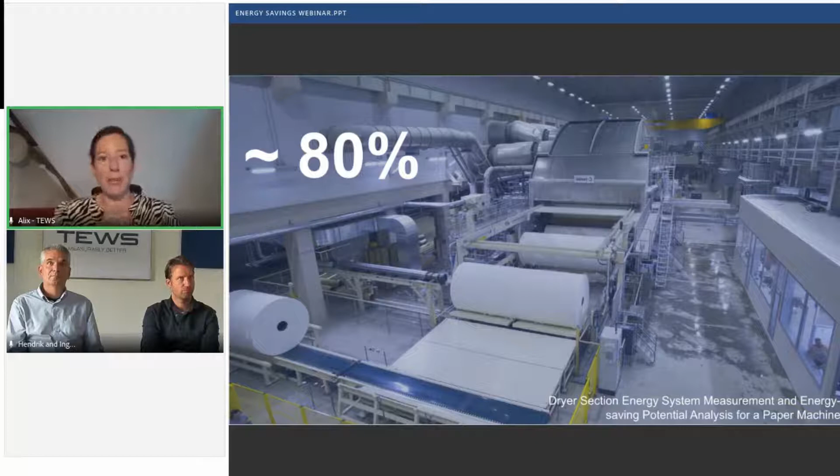At TEWS, this is something we have worked on in the past. Now, with the energy crisis that Europe is facing, the question is not shall we reduce our energy consumption, but how can we do it? That's why today we're hosting this event, because at TEWS, water is the core of our activity. This was a topic for the previous months.

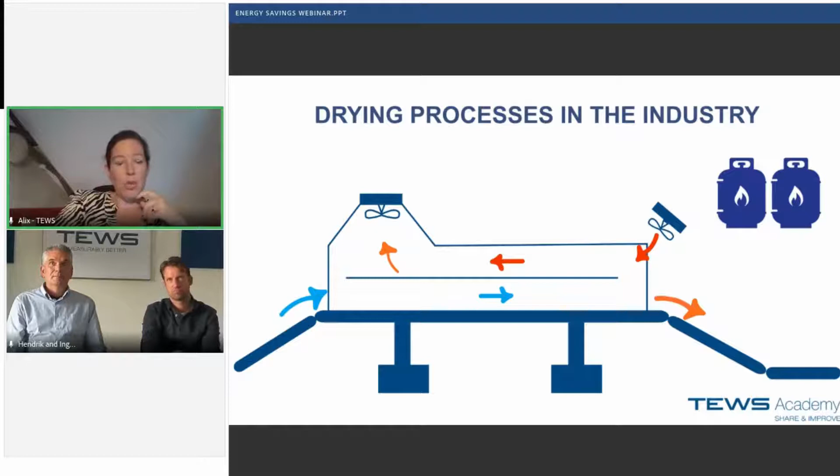When it comes to drying, the objective is always the same: removing the water from the product. So maybe, Hendrik, can you tell us through physics eyes what happens in the dryer, no matter its shape or process? Why is it so energy consuming, and maybe how could we help to reduce this energy consumption?

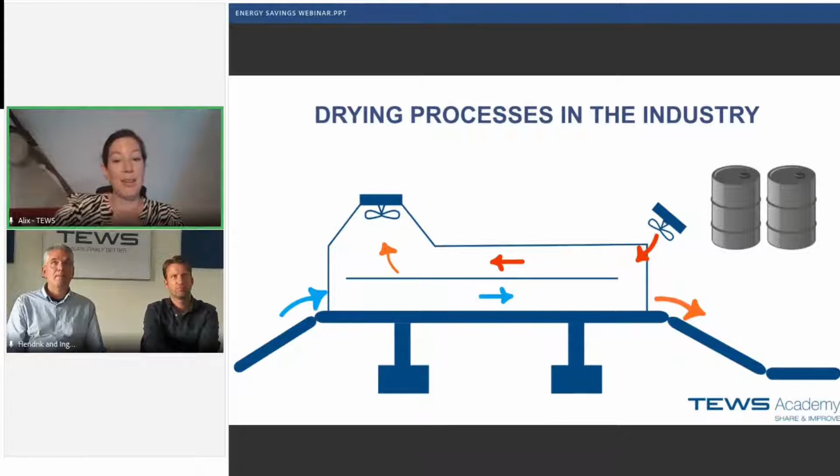Sure, welcome. I won't go into the details of physics too much now - it's a passion of mine, to be honest, but everybody sharing this with me is of course welcome to discuss this later if you like. So, the goal of the drying process is to remove water from the product to achieve a process-specific target moisture. Our technology allows for controlling this process, either backwards, as you see on the picture, measuring right after the dryer, or even upstream to the dryer in some situations too.

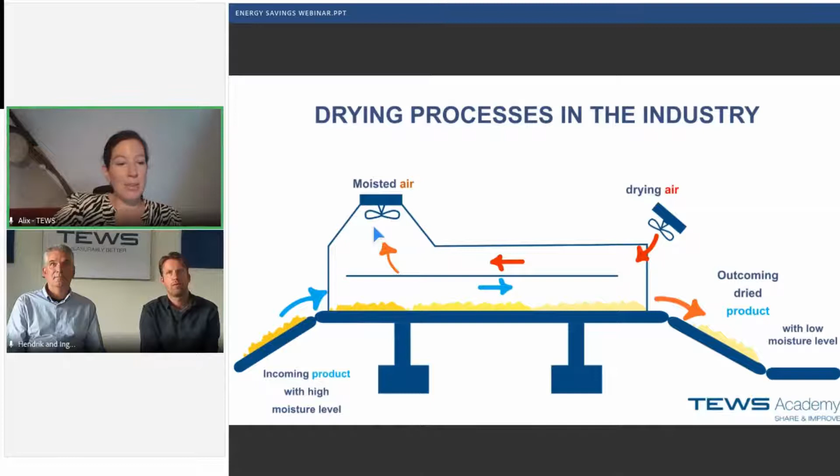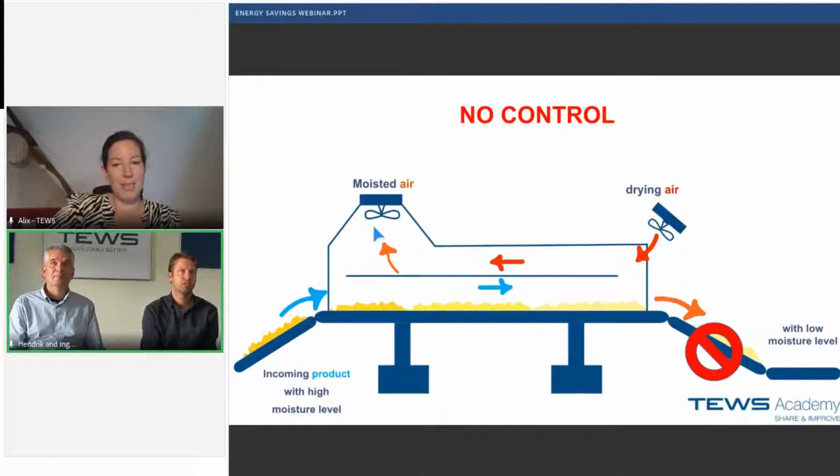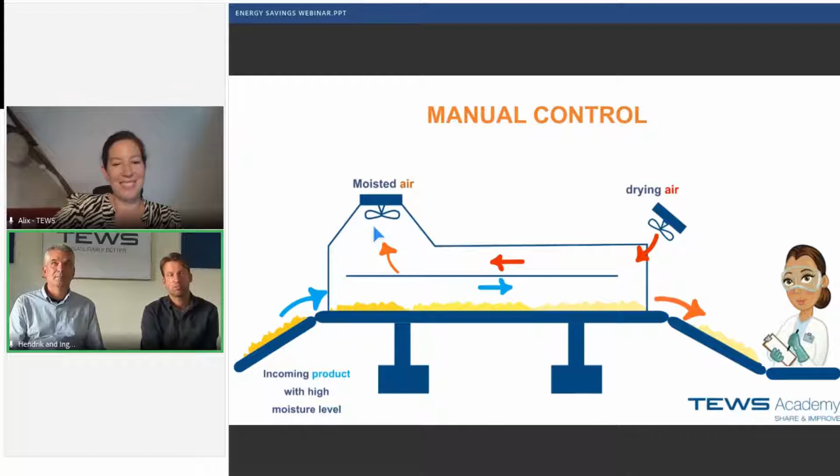I think there are many ways to control the moisture. First of all, it's clear that without any measurements, an optimization of the process is not possible at all. So to determine the moisture can mean just taking samples from the line, like the lady here, or using smart sensors like ours.

Okay, and so maybe can you illustrate furthermore? Yes, of course, we have a little animation here to illustrate this. So what we see here is a standard drying process - it shows how the moisture content of the material decreases over time. And as we can see, since the curve is getting less and less steep, the drier the material becomes, the longer it takes to further reduce the water content, right?

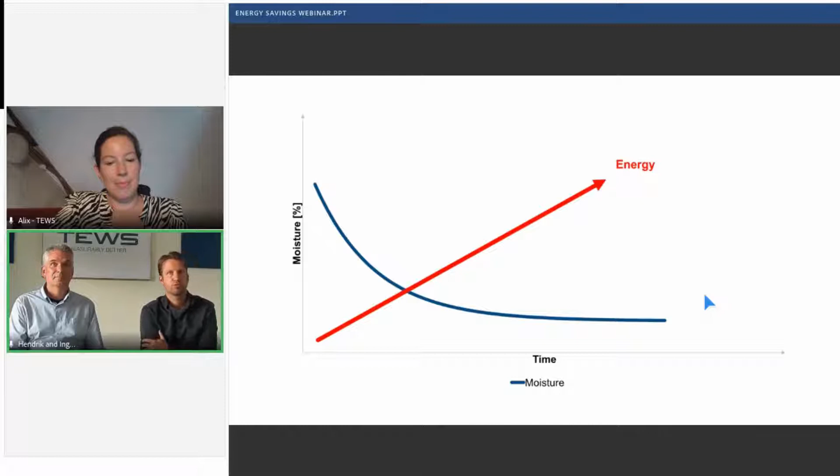The more energy is required to remove the very last water drops. So there is a point when the drying process is supposed to be completed, when the threshold is reached, like here. In order to ensure the required quality and save energy, we want to stop the drying process just right in time, as soon as the threshold value is reached.

For this purpose, we need some method to measure moisture. This could be just taking samples from the line, taking them to the lab, drying them down to zero in an oven, and waiting for the results to come back from the colleagues in the lab. But this is quite time consuming, and this is time we do not have. It's also energy intensive.

So instead, online measurements provide the results much faster, and that's the reason why those are really mandatory in this situation.

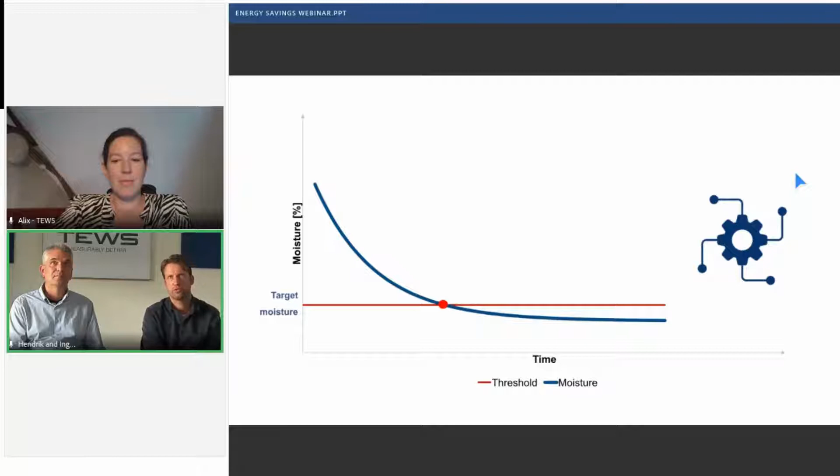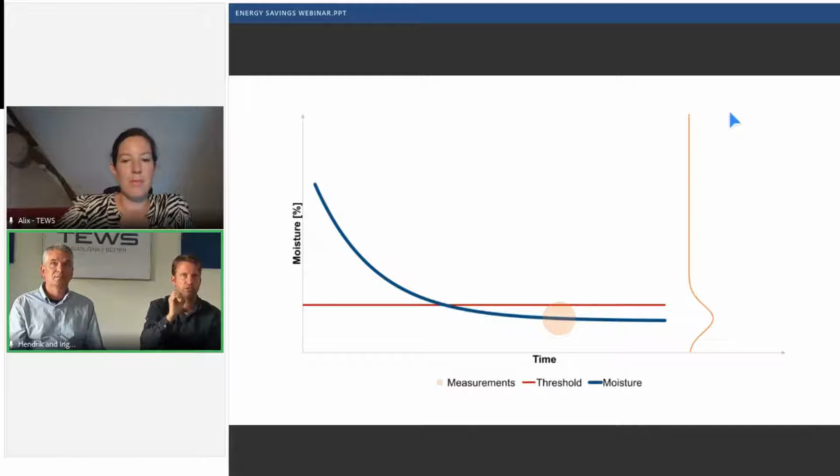Now, if we want to be very sure that the threshold is already undershot, we have to wait until the majority of these measurements, not only a little bit, not only half, but a majority, are really well below the threshold. So to be able to stop the drying process as soon as possible, we need to use a measurement device as accurate and precise as possible.

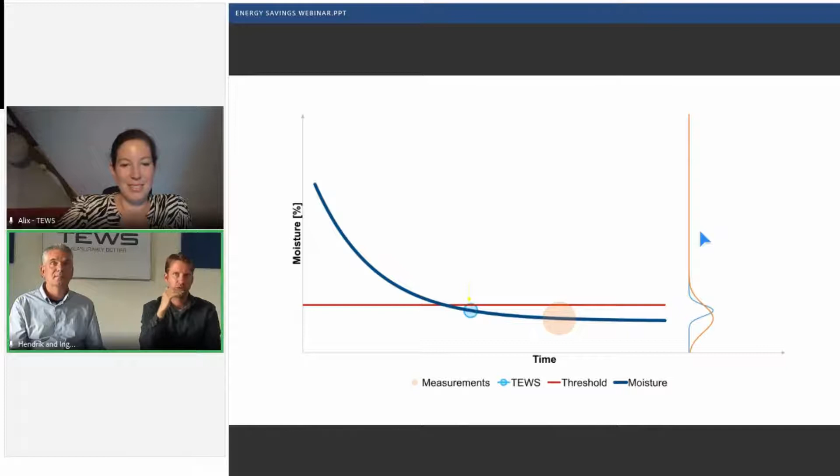In this example, I've given a microwave device as provided by us, by TEWS. We can see on the right-hand side again a new Gaussian distribution, this one in blue. It's narrowed down because it's more accurate, so it fits earlier under the threshold. And if we recall the energy curve, we see that the energy consumption can be decreased tremendously by that for many situations, and you will give us an example or two later on.

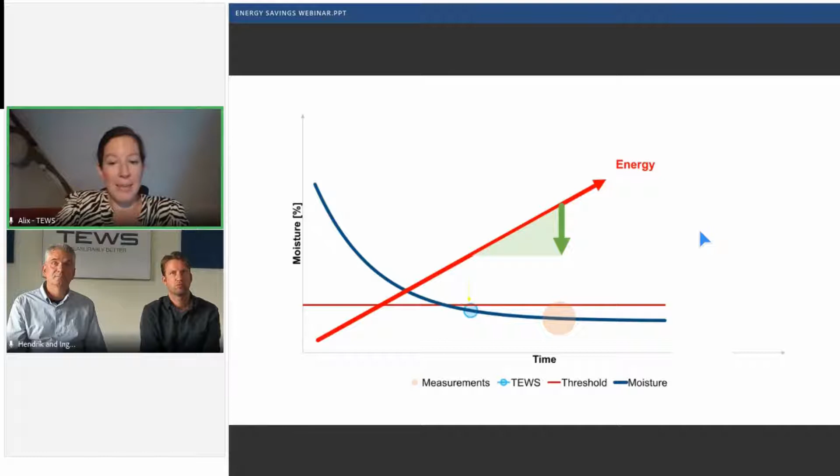So you're insisting on the accuracy, and I understand that the more accurate we are, the earlier we can stop the process, and then the more energy can be saved at the end of the day. So it's all about accuracy. Maybe we could give our guest a short explanation: why is TEWS technology more accurate to use than other measurement methods?

Well, that's because of the very nature of the microwaves you use. Microwaves are completely penetrating into the core of the material and not just measuring the surface, like it's the case for NIR, for instance. So the microwave measurements represent the material on the conveyor much better in comparison. And for the same reason, the method is also not as sensitive to environmental conditions, like varying air humidity or varying temperatures, which mainly affect the surface of the material, pretty quickly sometimes. But the core would be unaffected by this, and we measure the core. So again, our method really represents the material much better.

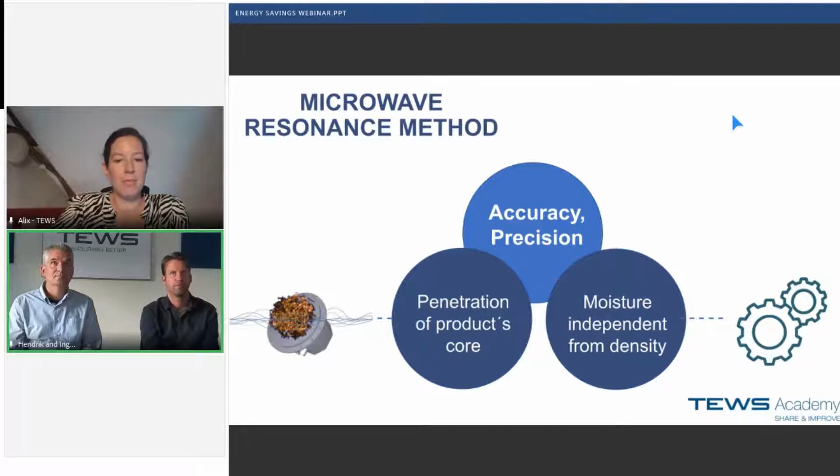Another important reason is that our technology can measure the moisture regardless of how much material is currently on the conveyor, on the sensor, and even regardless of how dense the material currently is. This should be clear and simple, but it's not the case for every device on the market. For us, this is a great advantage of our technology, especially in comparison to the so-called capacitive methods. So to sum it up, it's really the very nature of the microwave frequency range, which is just very well suited for all these types of applications.

Precision, huh? So in order to see how precise moisture control enables energy saving, I suggest that we take a few examples directly from our industry partners who were kind enough to share some data with us.

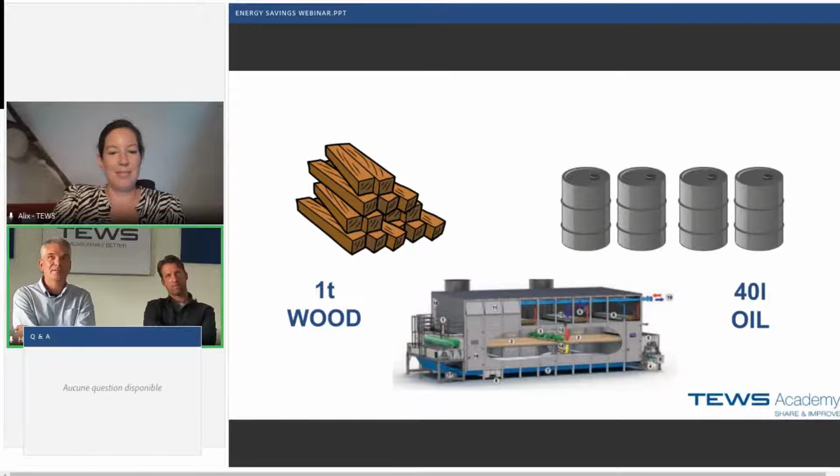Yes, Alix, very gladly. So we know from our wood manufacturer partners that to dry, for example, 1 ton of wood, around 40 liters of oil is needed. So legal norms oblige companies to make sure that the wood or certain products made of wood are below a particular limit of moisture.

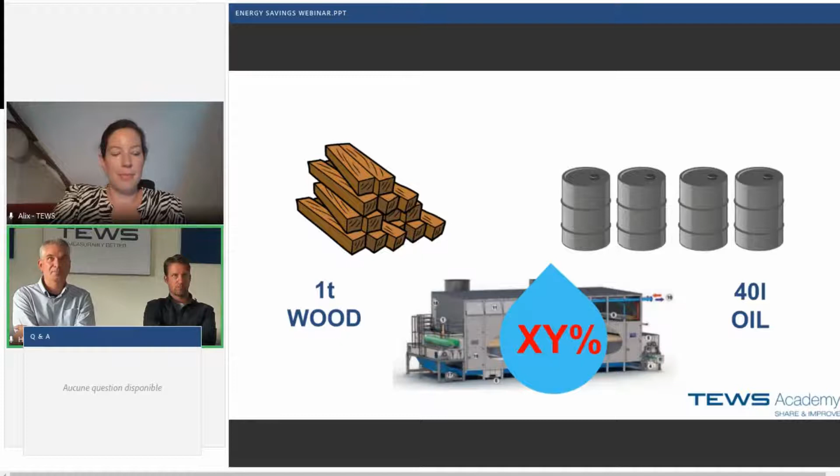So as an example, we can take the wood pellet industry. Wood pellets are classified in different qualities. For instance, the ENplus pellets, which is a European standard - for them, the moisture has to be below 10% water content.

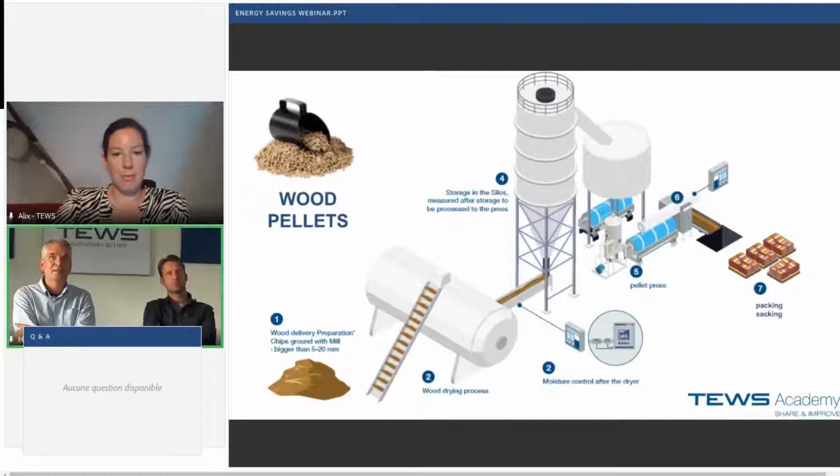So in the global manufacturing process of wood pellets, there are different places where we can control the moisture, and for the finished pellets, even the density. Regarding control of the energy consumption, it is interesting to install a sensor right after the dryer, because obviously the dryer has the highest energy consumption - this is the main spot to influence the final moisture of the pellets.

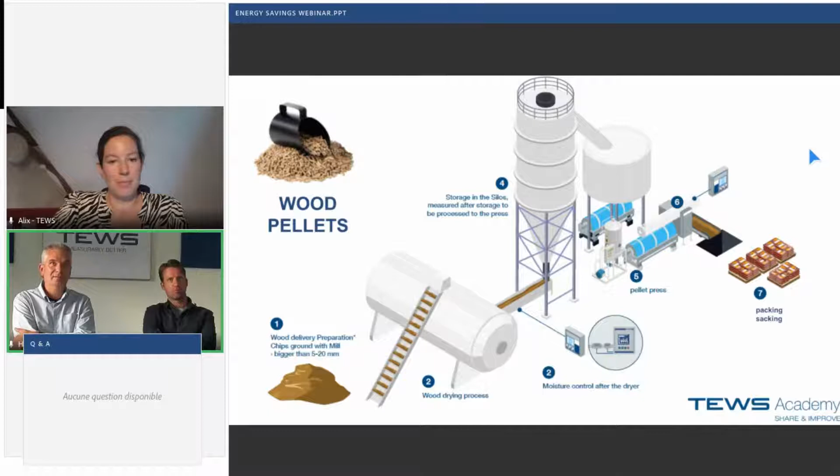So what we use is a planar sensor with a flat surface. You can see it in this picture, and it looks like a plate. It can be installed very easily within the flow, and it will not be an obstacle for it - the product is just flowing over it. This is the most accurate sensor to be used in the wood pellet industry.

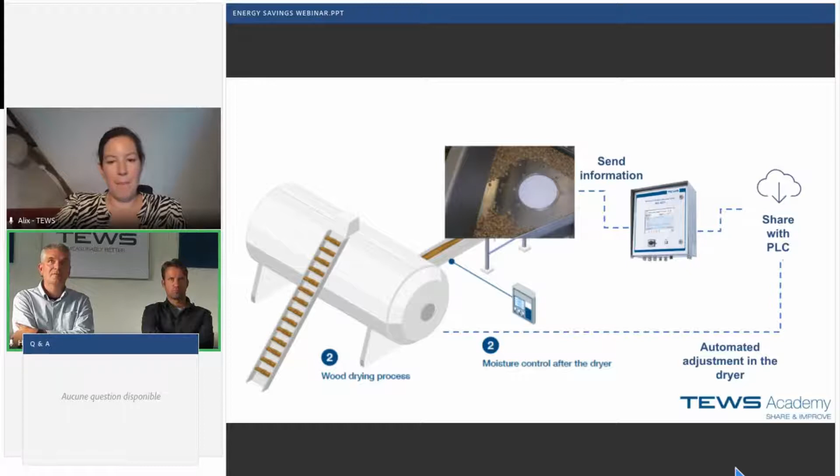So the sensor sends and receives the microwave that penetrates the pellets, which are flowing over it where it is installed. Typical installation spots are chutes or hoppers or something where the product flows, so where it is in permanent movement. And the sensor is connected to an evaluation unit, which is nothing else but a CPU, a processing unit, which calculates the signals of moisture, density, and temperature being transferred to the PLC.

And in the PLC, the measurement values were processed as information to adjust the dryer automatically according to the received signal. So that is a kind of dryer control loop at the end of the day.

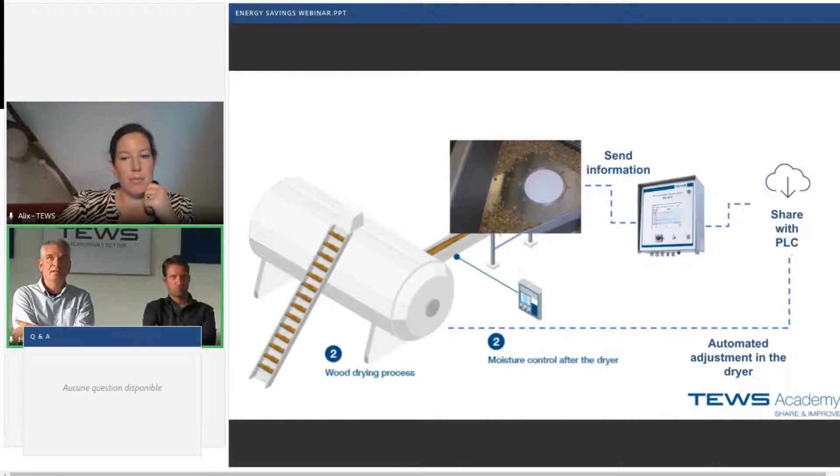And before using TEWS, the control of the pellets were done manually - people were taking it from the line and going to the lab. So by the time they got the result, obviously the pellets were over-dried, right? Yes. So I think that was quite an improvement for the wood partners that we have.

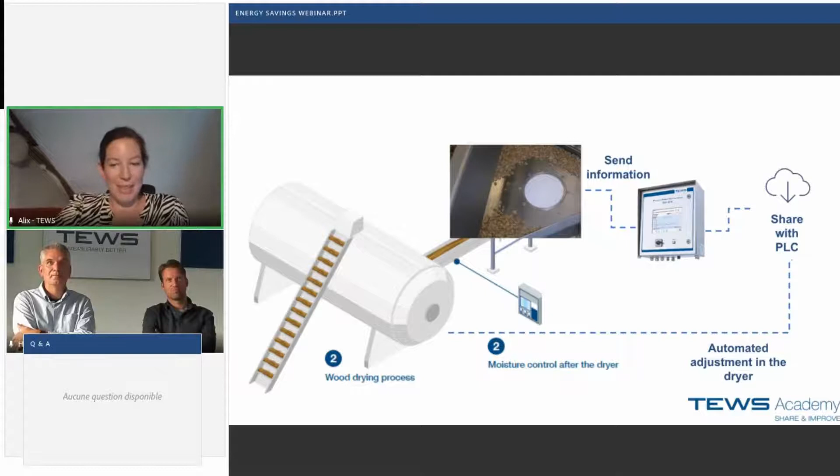And maybe as an addition to this - of course, when the pellets have to be below 10%, it doesn't make sense to dry them down to 9, 8, or even 7%, because this is pure energy waste. If you remember the curve, the last water drops are hard to remove and energy consuming, so 10 is already reached earlier in the process. We can imagine the improvements with the correct measurement method.

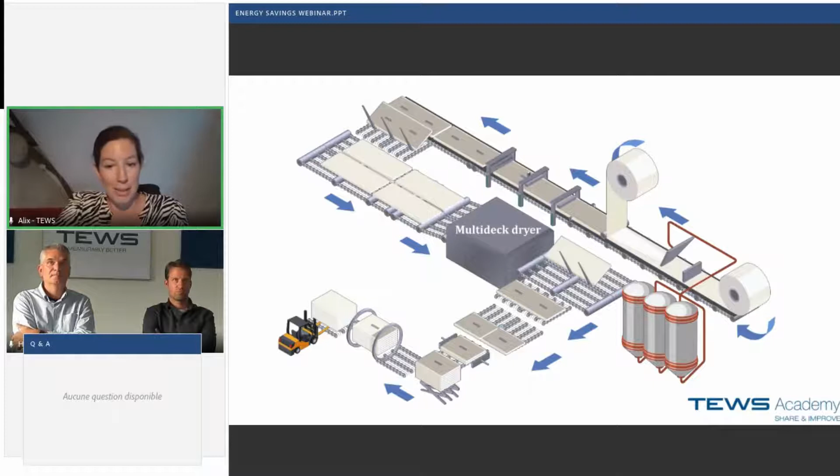And I wanted also to take the example of another industry, the gypsum industry, which we have worked with in the past because they have very complex dryers to manage. Maybe you can say a few words.

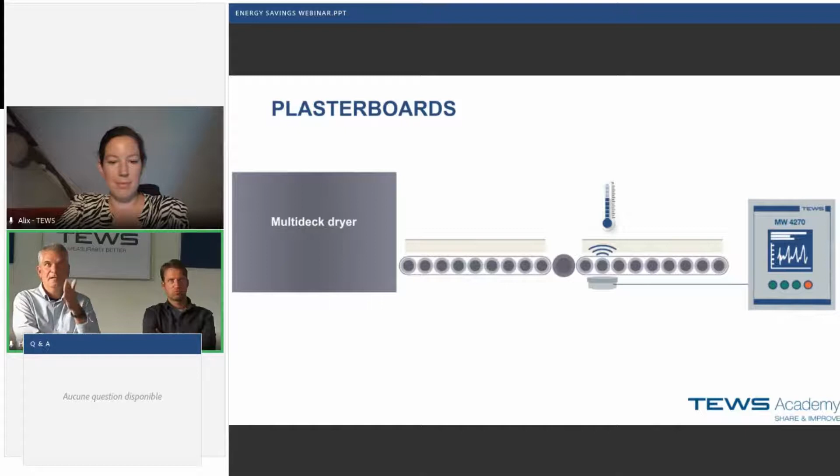Yes, that's right. So here, one of our customers, one of the major plasterboard manufacturers, uses a multi-deck dryer. Thanks to the measurement of our planar sensor at the outlet, we can measure inline the moisture of each board, the weight per area, and the temperature. And the outputs can even be configured so that we transmit, besides the average values, also the profiles of every single board - it's really like we cut the board into single pieces and measure a real profile. This can be seen here in this screenshot.

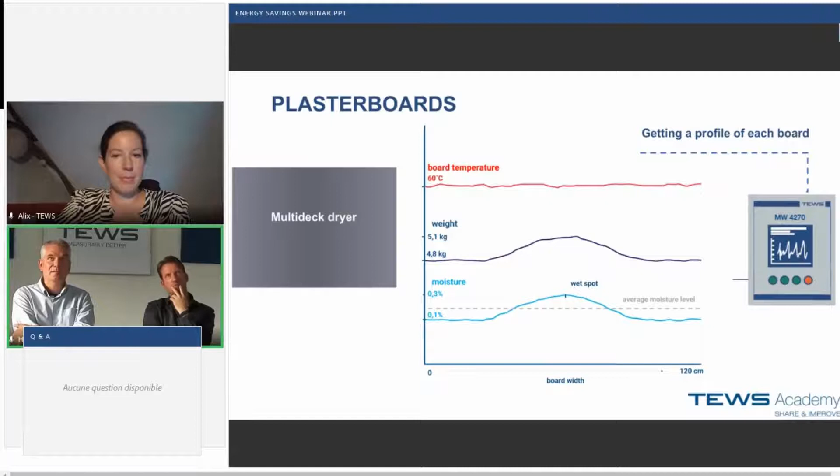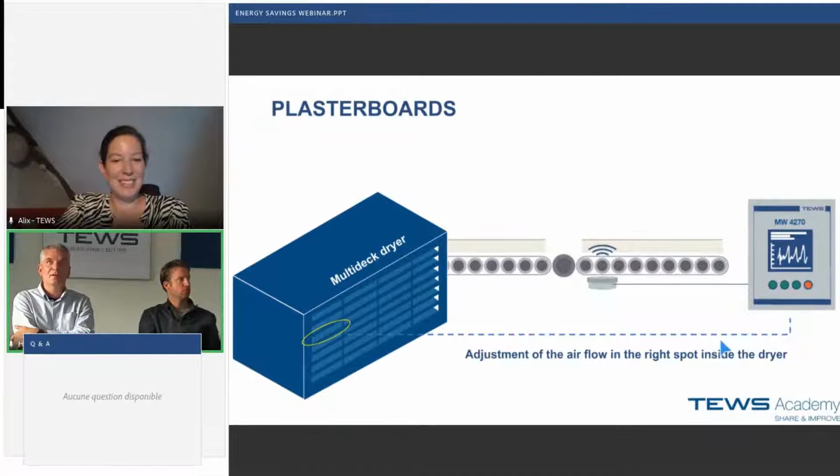So our customers can even track wet spots left inside the boards, invisible for the eyes, of course, caused by incomplete drying. So what can happen with the dryer when we get these defined values to the dryer PLC? The airflow can be adjusted accordingly with the position where the board was in the dryer.

In addition to energy savings, the boards do not need to be over-dried because of our high measurement accuracy of more or less 0.1%, sometimes even better. So they can be dried right on target, not too wet to avoid scrap and not too dry to reduce energy costs. Adjusting the airflow is much more efficient than just raising the full dryer temperature, which risks damaging other boards that were already perfectly dried.

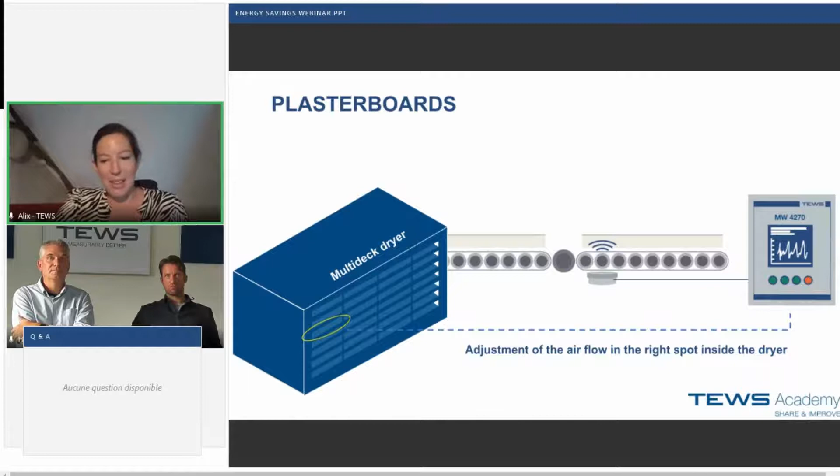Okay, that's interesting. Now let's speak with data. I'm sure our guests are interested to know how much energy we can save, and maybe also how much money they can expect to save with our solutions.

I think most people know that TEWS is strongly involved with the food industry, and one of our customers was kind enough to share with us the real data from production.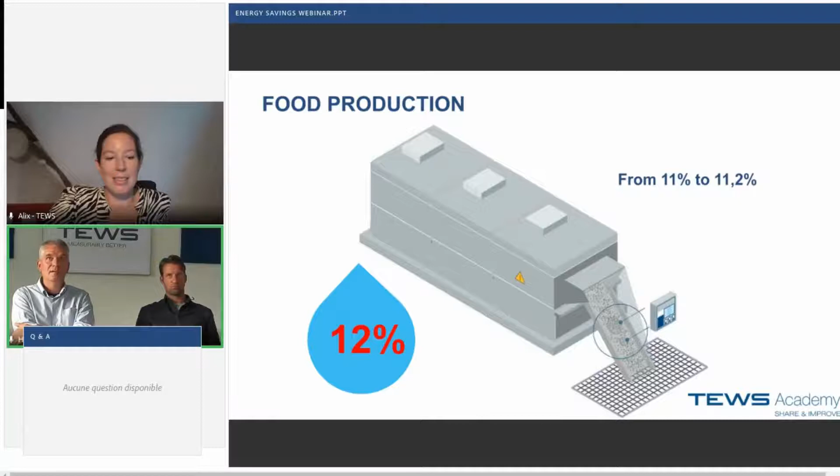In this case, for legal and quality reasons, the product's moisture level must be below 12%. Our partner was drying it down to 11% to be sure to reach the legal norm.

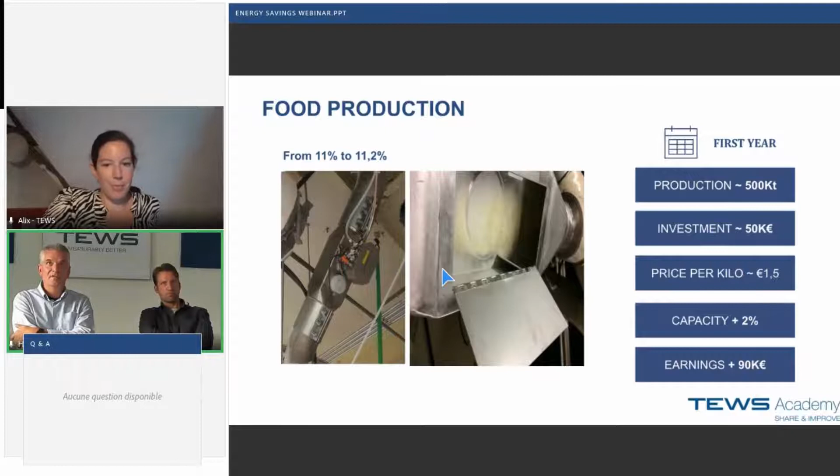They invested in our solution and decided to test the first year with a planar sensor installed right after the dryer. Just raising the level of moisture from 11.0 to 11.2, so just 0.2%, to still be on the safe side. The time saved with inline measurements enabled them to increase productivity by 2%, just by increasing the moisture level from 11 to 11.2.

So the benefit of this productivity increase regarding the price they sell the product was 90,000 euros for the first year already.

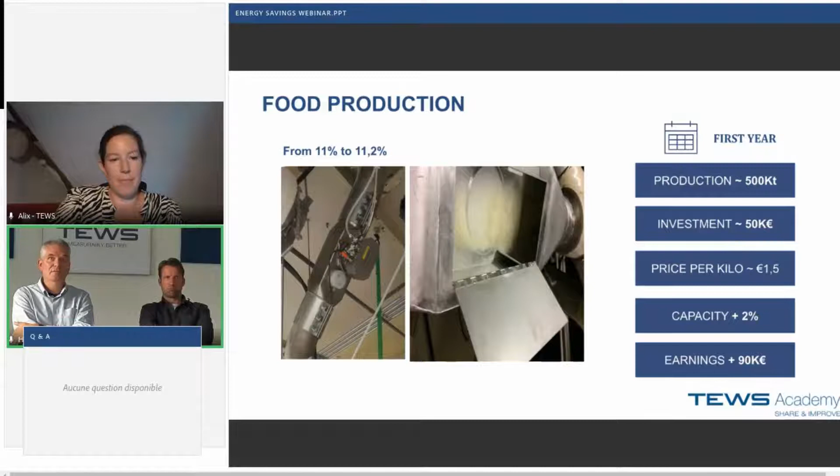Last but not least, because maybe we should keep some time for the Q&A, as we closely work with the pharmaceutical industry, and this industry is very demanding in terms of standards, we also have with us an example from a partner from this industry.

The example from the pharmaceutical industry is really interesting. For producers, moisture levels are not only a means of legal requirements, but also incredibly important for the efficiency of the medicine produced. And when the batches are overdried, they cannot be reused nor thrown away in a simple bin.

Let's check. Inside the fluid bed dryer, the machine that dries powders or very small pellets, this avoids the laboratory having to interrupt the process, take samples, wait for the results, and then turn on the process again and again, stopping and measuring until the right moisture is reached.

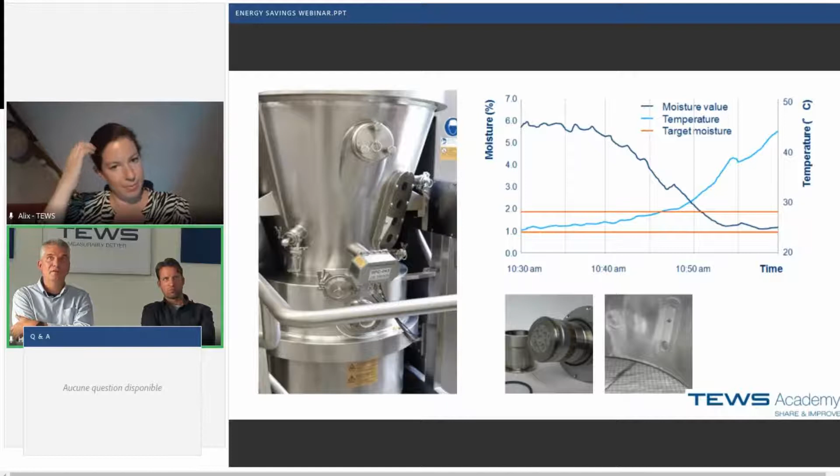So it usually means around 10% energy consumption savings, but also up to 75% time savings of manual work in the lab.

Production data with us shows they saved 300 hours in a year, and this means, in this particular case, plus 190,000 euros regarding the price of the material and the handwork, by investing around 100,000 euros for 2 TEWS sensors. So as you can see, the ROI is obviously very good.

And let's imagine the year after the investment, when there is no investment to do, then the benefits are even higher, because the nice thing is once the system is set, it's running for years.

That's correct. Our systems are almost maintenance free, and there's no requirement to recalibrate them from time to time. The calibrations are very long-term stable, and some systems in these applications run for even 20 years or so with the same calibration.

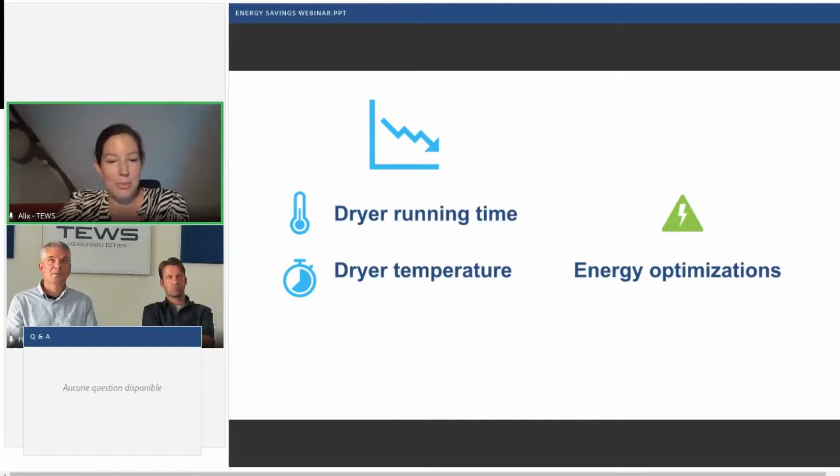So the best way to check how this technology can help you is to study the return on investment. For this, we have a small tool at TEWS. I can just introduce it to you.

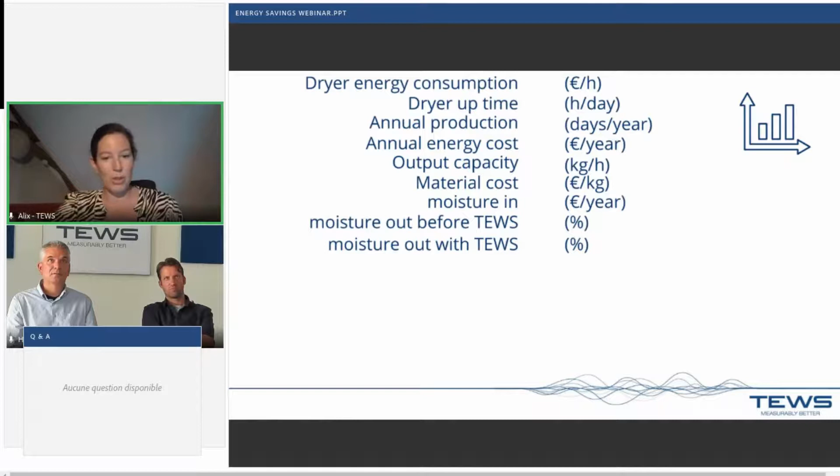If you come to us with some data from your production, and provide us with elements like the dryer energy consumption, the level of moisture of the incoming product, and your target moisture at the end of the process, then we can calculate with you the potential expected energy savings at the end of the day. We can also estimate material and labor savings regarding your main goals.